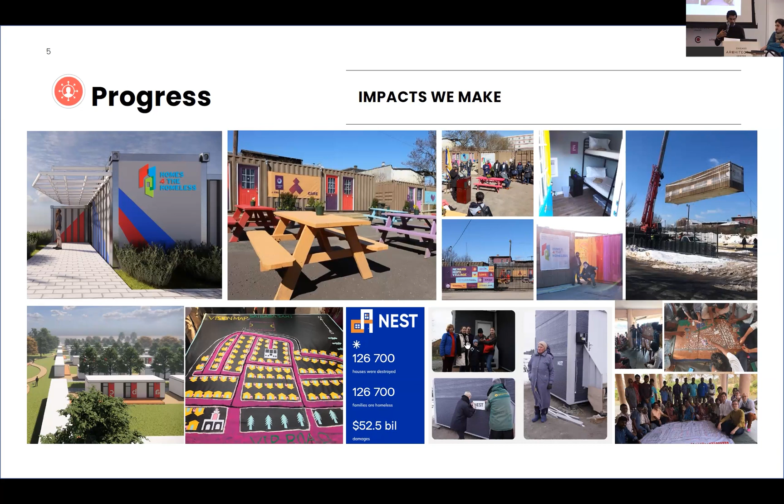And we have a lot of initiatives going on, right from trying to find solutions for affordable housing or homelessness or building a bomb shelter in Ukraine and so on. Today, we want to discuss a project which is specific to this crowd. It is actually two projects. It's a school that we've 3D printed in Africa where we don't speak the common language. There is a time difference. There is no electricity on the site. There is no plumbing on the site. And yet, we are able to deliver a school in less than a day.

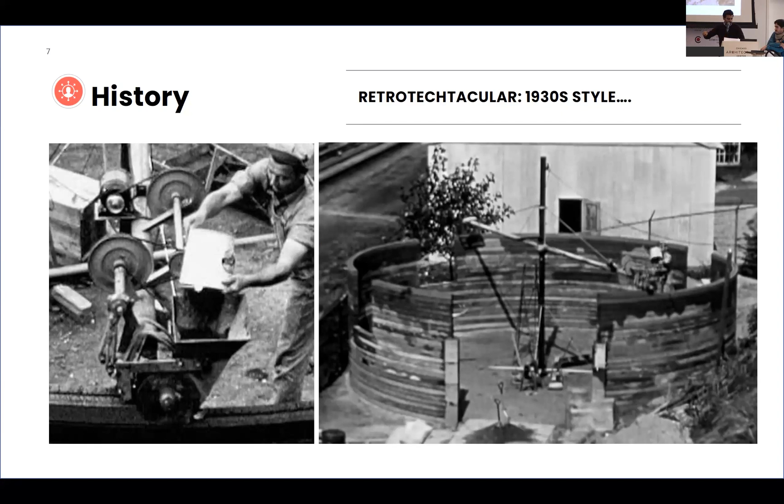Diving a little bit into the technology, 3D printing is not a new technology. The first patent to 3D print was 1941, before any of us were born, hopefully, in the room. And it was as simple as someone pouring material and a manual person just moving the output in a circular fashion, all the way through innovation today, where you're printing on Mars and exploring the Martian ecology, and understanding that we cannot send human beings there. And how can we send machines who can set these things up?

And the reason I'm proud and humbled to speak as a nonprofit today is because we somewhere lie in between printing things on Mars and how we can use technology. Technology is only as good as the question we ask it. And I think that is super important to know, that it's a loaded gun, whether you're on this side or that side, right? So we came together with all these 30 people and made a framework for ourselves that we operate in, and we'll show you how we can execute these things in a project. The four cornerstones are innovation, material, sustainability, and technology.

So with that, the reason why we chose to 3D print, I'm going to go really quickly over the whys and then talk to you about the hows. 3D printing is faster. The classroom we did was less than 18 hours to print. It is economically scalable. The first house might be expensive. The 100th would not be that expensive. Less labor. You can build more complex structures. You don't have to make formworks. It doesn't need to rest. It is a machine. It can print 24/7. It can be more sustainable. And we can look at how we want to evolve when it comes to workforce training.

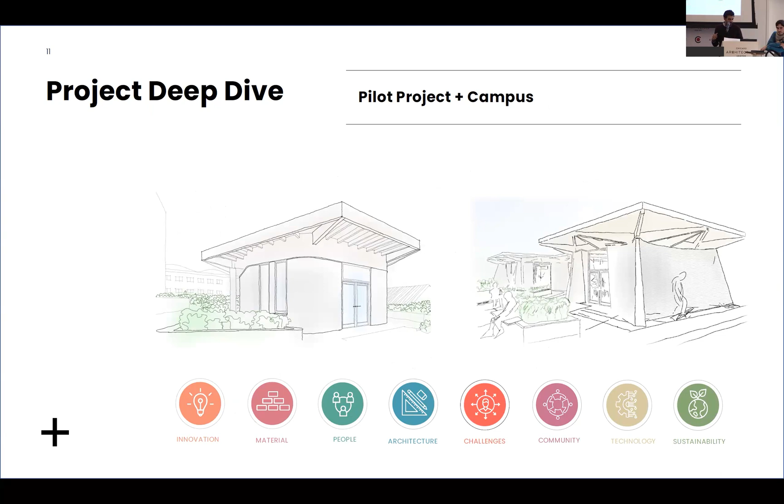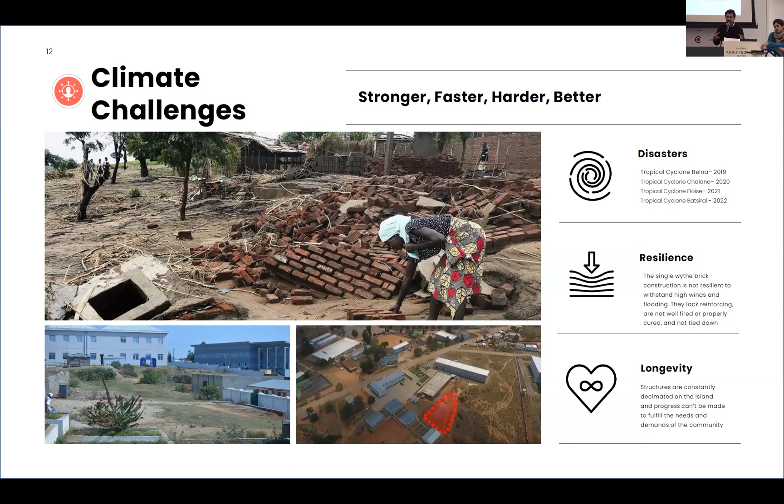So we're going to talk about these two projects. We have some models here we'll dig into a bit later. One of the other reasons that we chose to 3D print is in Madagascar, east coast of Africa, every year there has been a cyclone. And so whatever they build gets torn down. And this school not only serves as a school, but as a shelter for the community during a cyclone. It serves for other activities after 5 o'clock to get the community together. So technology can play a role, not just in sustainability, but in bringing people together.

I'm going to hand it over to Bruno to get into the process of 3D printing. Hi, everyone.

So 3D printing is but a fraction of the bigger question of automation and construction, right? So we're going to do a deep dive on 3D printing and just kind of see how it can handle the big picture. What we're talking about is automating construction, which is a theme we've heard here today already, right?

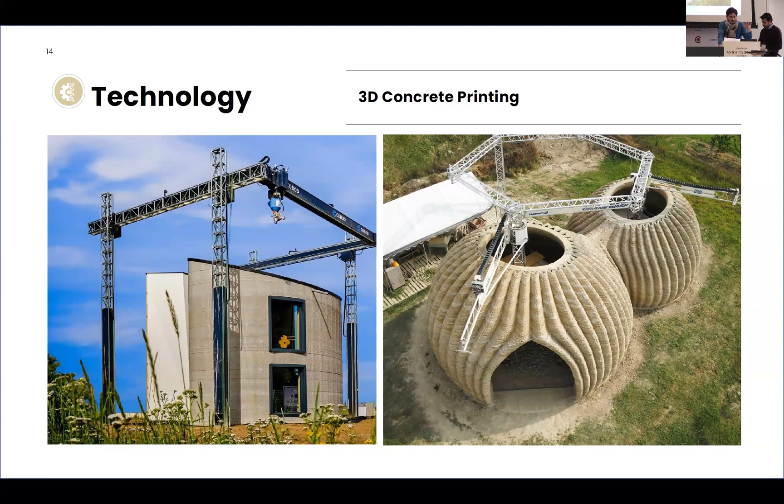So some of the technology we're talking about here: on the left is the gantry system from Cobod in Denmark, which we used for the first pilot project. On the right, we have the crane system from WASP, which is from Italy. These two are actually printing with two different materials. On the right, that's clay composite, and on the left, that's concrete. And we also have geopolymers as an option for printers. And we actually have metal printing, which is a sintering process, which is very expensive, but will soon drop in price. But conceptually, these are kind of some of the pieces that we have here.

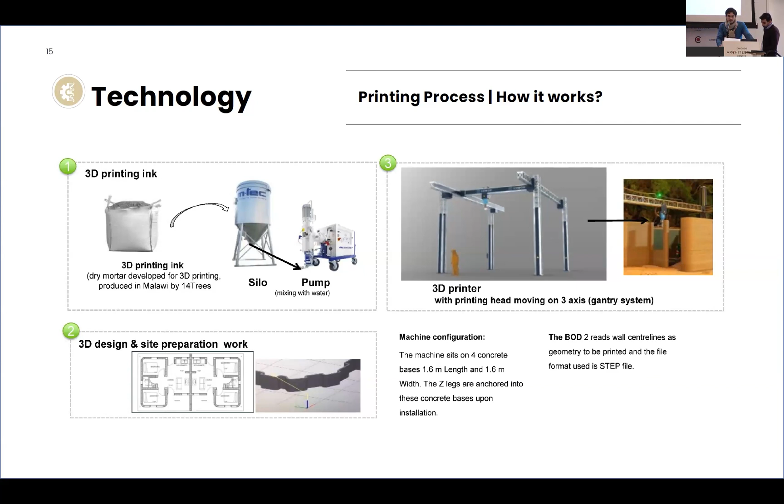So how does this technology work, right? It's actually probably not that different than what you've already experienced in your own offices or elsewhere, where you have a material, maybe it's a spool in your desktop 3D printer. In our case, we have a bag of cement. Then we have a silo, which the material goes inside of, and we have a pump that mixes that in, right? We have a 3D file, a STEP file that we feed into the machine. And then you press play, just like you would on your desktop 3D printer, it goes to the crane or gantry system, and then we get our output, right? Our building, which in most cases right now are just walls.

The wall typology is actually what was the most exciting piece of this initially, because it dropped down cost and created less material use and higher sustainability. The wall assembly consists of a couple different measurements that you have there for the wall thickness and the cavity, right? So you can get more insulation or less depending on what kind of wall type you need. So you can go all the way from your R19 typical in residential. We could go R30 if we just make that a little bit thicker. Your cost is very minimal. To all the way to R60, which we've seen Lake Flato do in Austin, Texas.

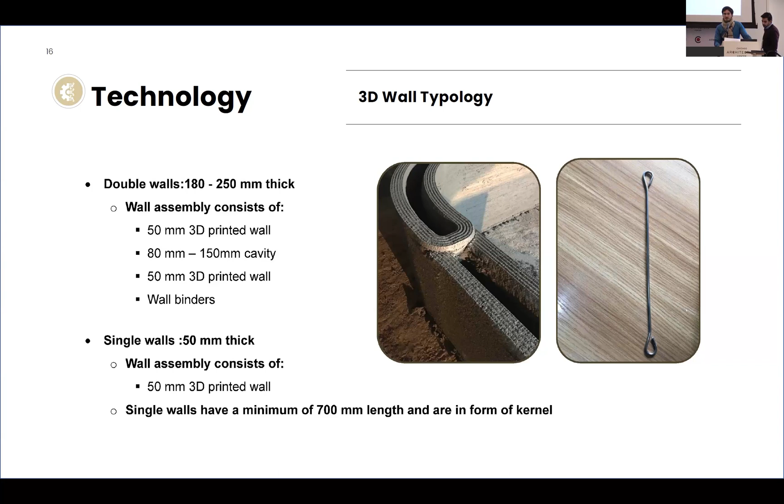And then in between, when you print like 10 layers high, maybe 30 inches off the ground, we have masonry ties. A lot of vendors are doing that. We actually don't think we theoretically need them right now because it's a 9,000 PSI concrete, so in compression it's very strong. So some of these things we're adding because it's hard to get permitting right now. So we're using comps to other systems.

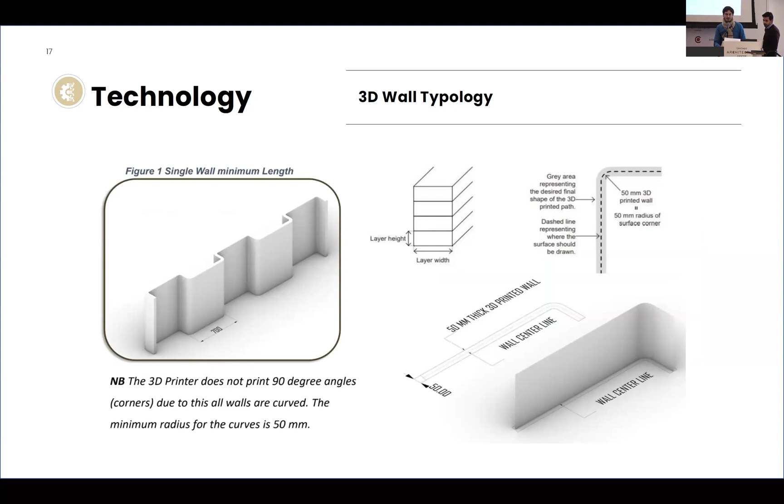You can also just print a single wall and you can just corrugate it just like you would if you're making your model, right? Your piece of paper or your chipboard doesn't stand straight, but if you corrugate it, it will. Same thing applies here. So a lot of techniques from simple model making can apply, right? So when all this stuff comes together, you can see kind of the wall typology. We have different masonry ties that pull the two pieces together. Sometimes you do 2 layers on the outside for a little bit more stability. A section of what that corrugation looks like. That's just a printing nozzle. You have your little corrugated pieces here, but we can get that flat as well.

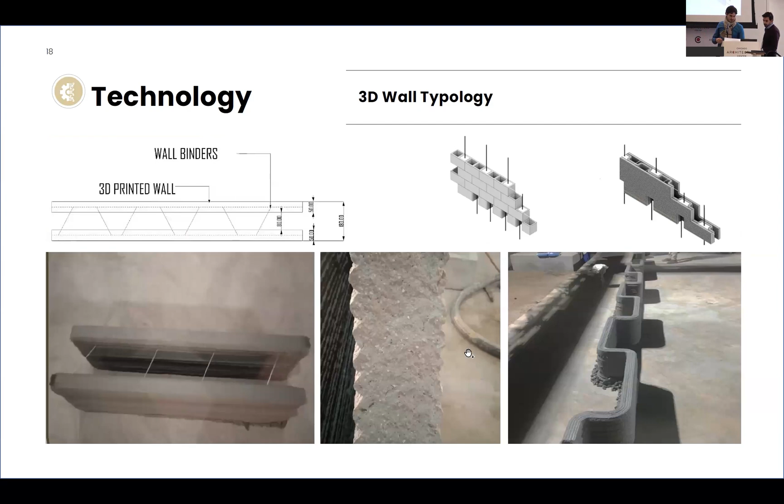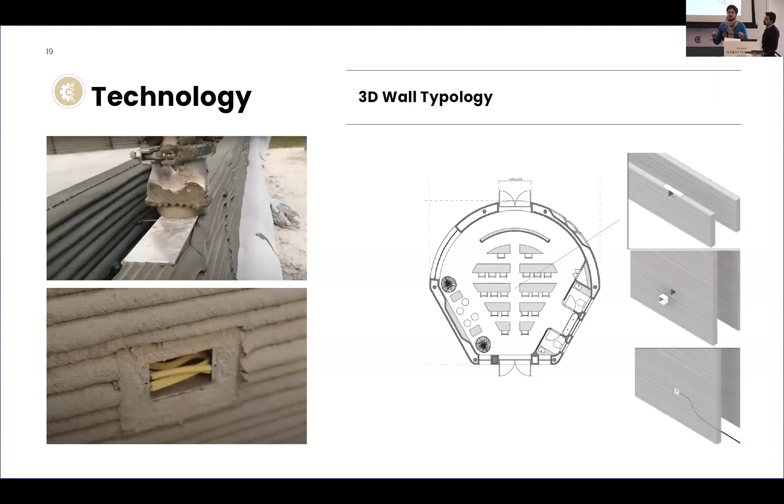And this wall typology here is from Icon, actually. Very little thermal bridging. You can see the concrete doesn't actually touch one another. And we have a big, thick layer of insulation in between. So really the bridging that we're seeing is at openings. So we have openings for doors, your apertures, your windows, that have to be higher performing, but the wall is extremely high performing for very little cost.

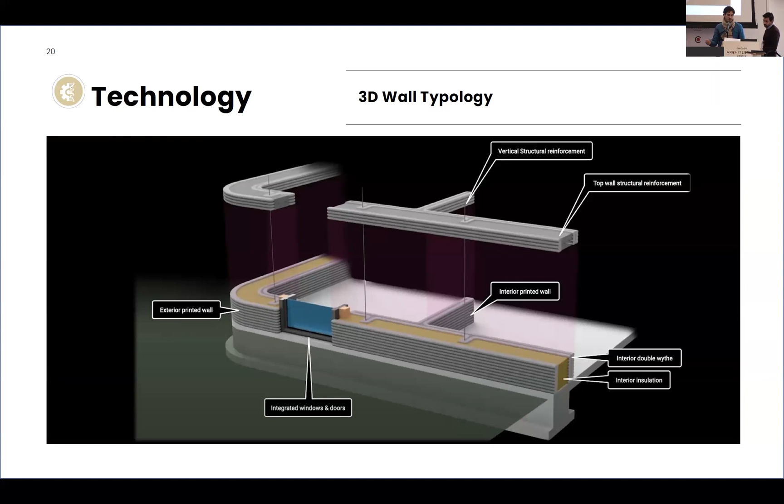So we actually see that beyond walls, right? You can build the foundations with it. This image is actually in Florida. And then on the left over there, both these sets of images here in Florida, we can actually have ICF panels and steel studs to be able to build our floor plates and or roof planes, which are also insulated, right? And we have on the bottom left from Peri, the first 2-story 3D printed apartment complex, which was in Germany. And this system that they used builds about 45-ish feet to 75 feet deep to 3 stories tall.

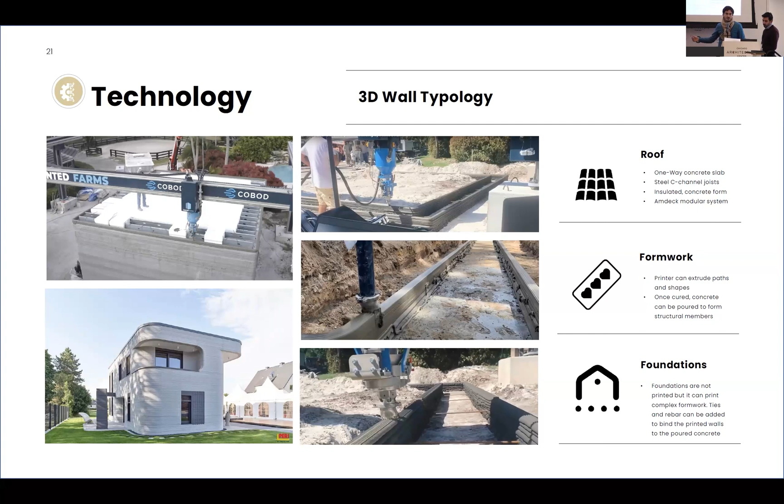So, you know, we're getting close to commercial applications, but we're starting in the residential market for a reason based on size and certain technical limitations. But this brings us to the era of the digital twin for project deliverables, right? For our project, we certainly did a full CD set, just like we would for everything else.

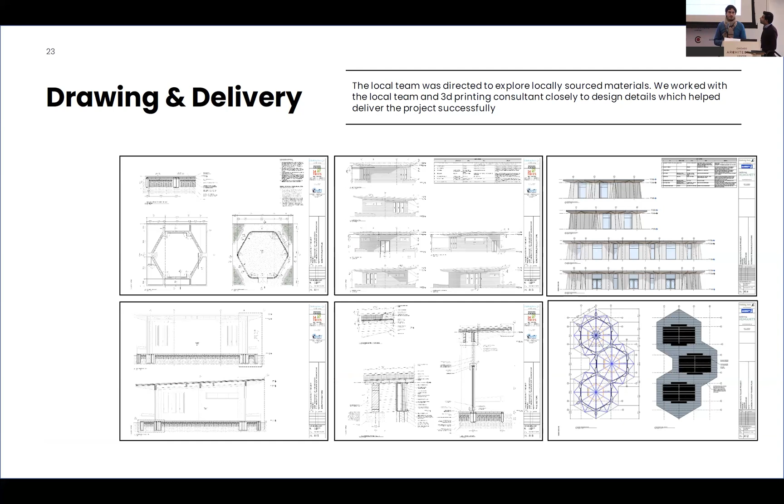But as we were working through this process, we realized even for our model making here, that the 3DCP file, that's your STL, your digital file, was actually the most important and critical piece of the project. And what you're seeing there is actually the same file that I printed. This is the next project, but same thing. I sent them the same file that I printed my plastic model in, and they printed that on site.

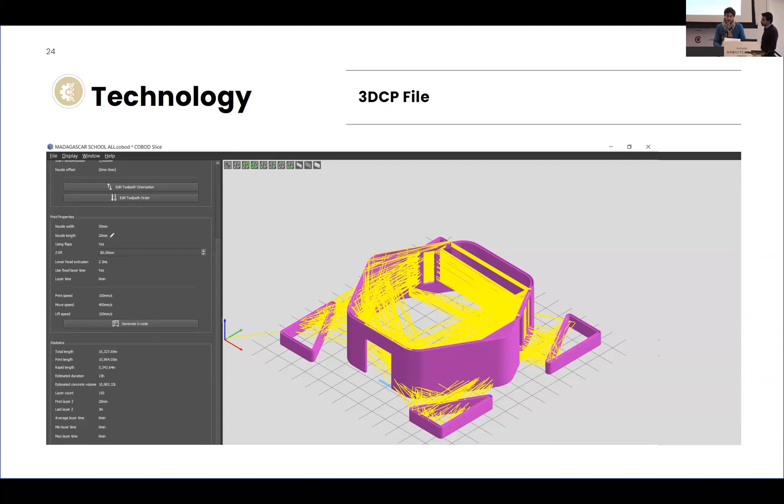And you can see that actually looks really close to what you guys probably use, your Curas, your MakerBot software, very similar. And it says 15-hour print time there. We achieved something very close on the job site. So that was the printed model that I printed at my office. And this is actually radically transforming timelines as we see it in the project. And it's empowering the local workforce.

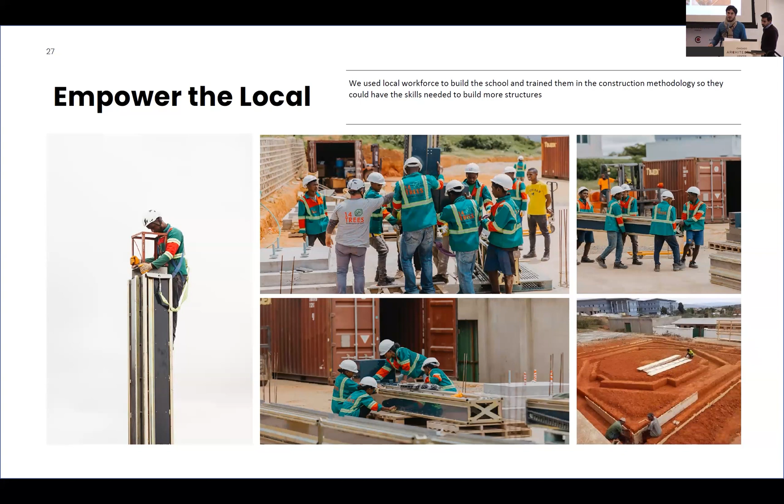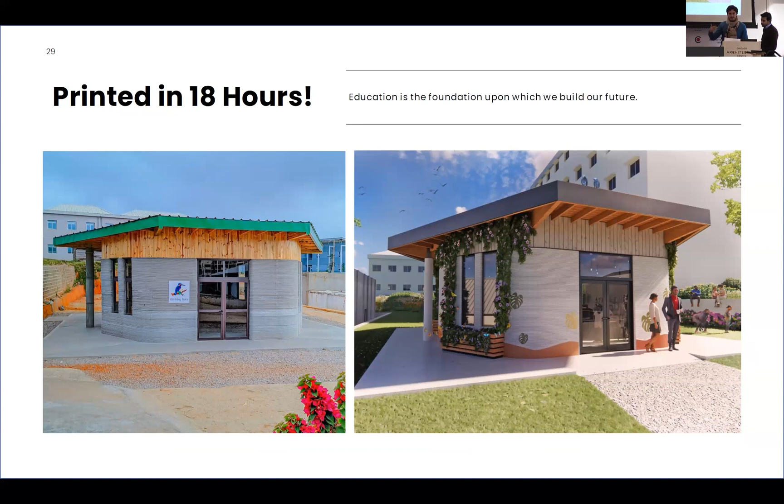And then we're actually evolving that typology a little bit, where we're trying to integrate columns inside of it. So the wall type becomes a formwork, which we pour the column into later, as we're still trying to figure out this technology, right? It's very new. We don't have structural buy-in for everything. There's no ICC, there's no IBC for this. There's no ASTM standards for it. We're all developing that in real time. So we have some backup systems, and that's why we're printing formwork to pour columns into to rely on that structurally.

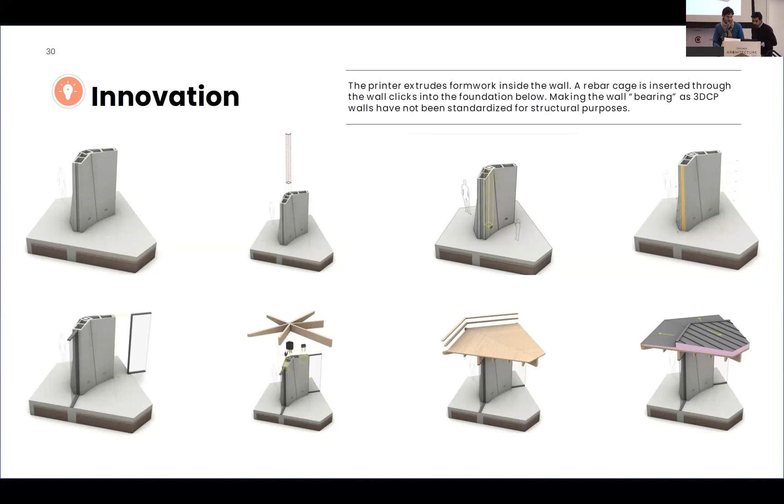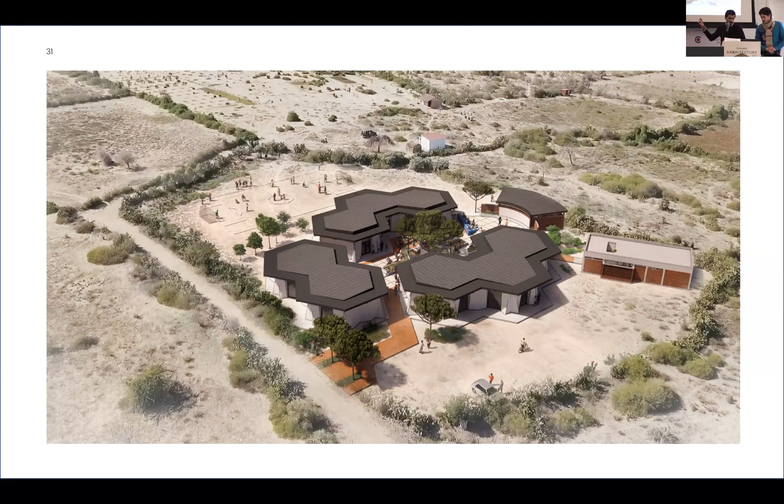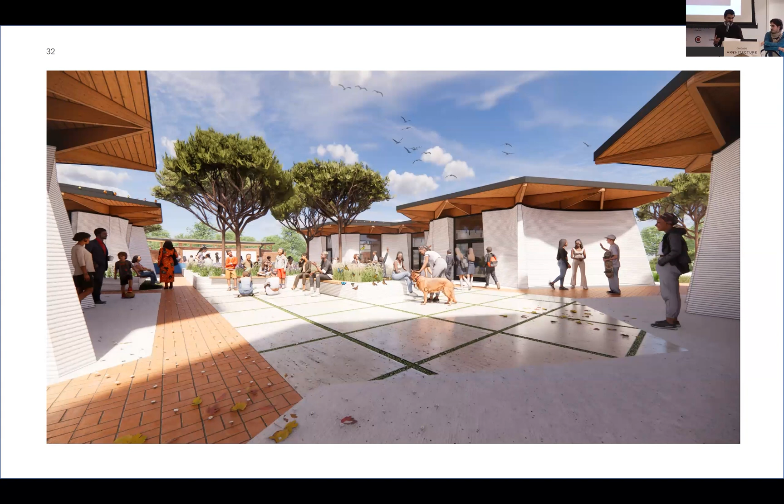So I want to talk about a couple more pieces of innovation as technologies integrate together. This is how the finished product looks. And you can see there's literally nothing in the context around, but the ability to create space, getting kids together, it doesn't look very different from any typical construction campus, right? We've used two different things here.

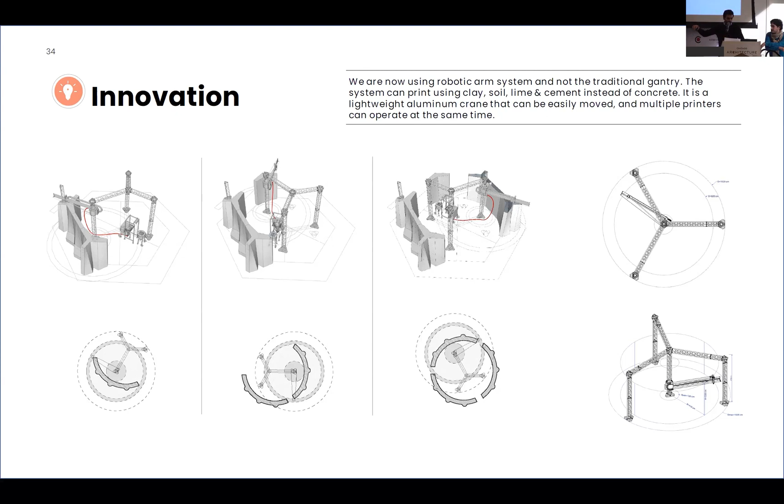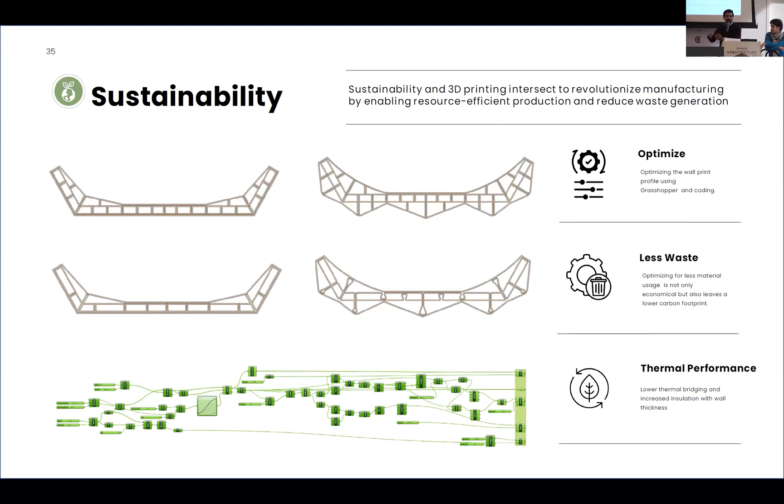So one is, yes, you can print any shape you want, but we've boiled down the whole project into 3 walls. With the crane printer, it prints the first wall. This one is aluminum, so you can pick it up, put it, print again, print wall number 2. And each wall is crafted, optimized, scripted to use as little material as we can. So even if we save 20% on one wall, after 4 walls, you can have the 5th wall free. After 4 classrooms, you can get the 5th one. So it's more sustainable.

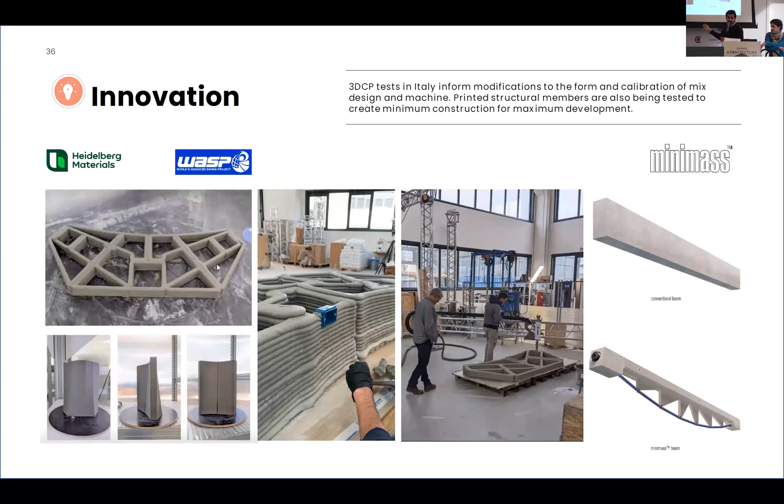This is the mock test printed in Italy. We were very excited. We're also working with a UK-based designer who is now figuring out how to print 3D beams and having a post-tension cable to it.

The next part of this is, for a change to be optimistic, it's not about losing jobs. We are now training; as we are talking, someone in Madagascar is translating all the training videos into Malagasy and French, and the kids are introduced to these courses. Very happy to announce that our partner is paying off the printer cost over 5 years, and the printer stays in Madagascar, and is capable of printing with soil. So they have the material, they have the training, they have the machine. And now we empower them.

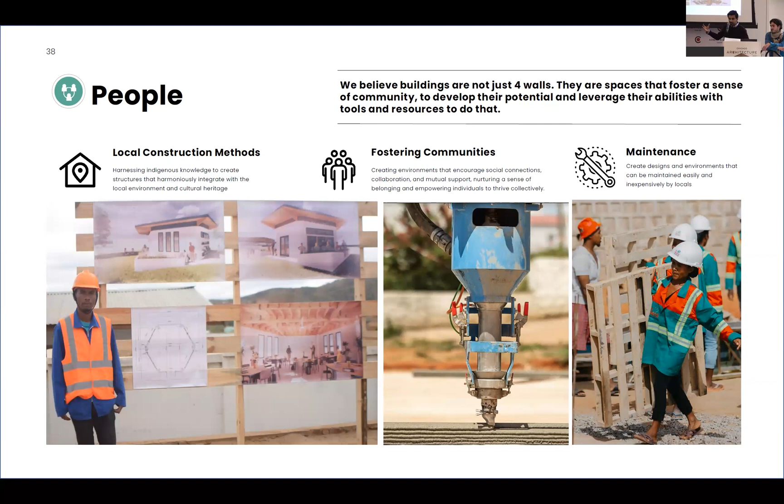We get local businesses, establish a pipeline of materials and so on. And technology is used to innovate and empower. I keep coming back to it because I think it is super important for us to be mindful, be empathetic, and have a purpose to our innovation. So with that, you're all welcome to come collaborate and share technologies and have a discussion about how we can do things differently.